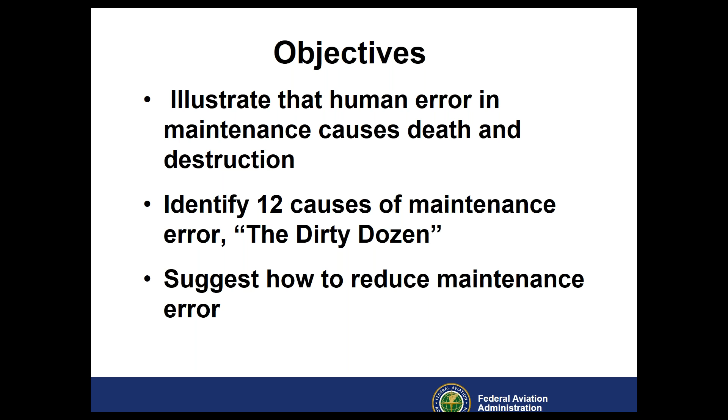When learning of an accident caused by human error, it is common to think the person involved is somehow deficient in skill or character, while we, on the other hand, are well-meaning, motivated, experienced technicians. We just wouldn't do something that stupid. When we think in these terms, we discount the moral of the story and miss the lesson in it.

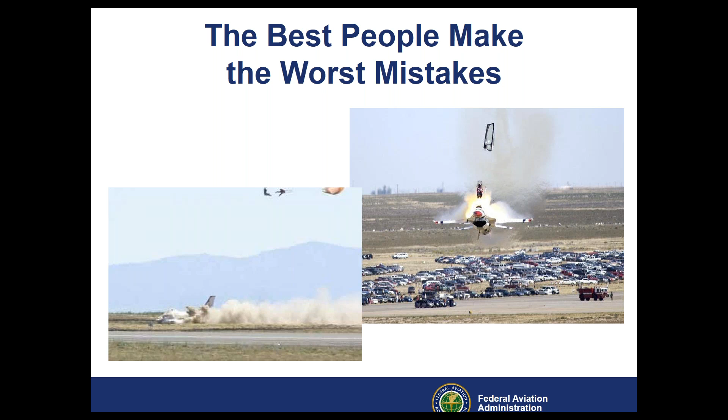Okay, well, or maybe I did find one ejecting from a helicopter modified by Rotor Floater. Not true, but an April Fool's article from 2015. So don't publish that picture anywhere and tell them it's a factual picture.

So how do we prevent mistakes like this one? How do we break the chain of events that may well result in the loss of an aircraft, or worst case, a fatality? The Dirty Dozen is a poster series highlighting 12 preconditions for unsafe acts. In other words, factors that influence people to make mistakes. The series of posters was developed by Gordon DuPont while working with Transport Canada. It's not meant to be a comprehensive list. It's just meant to stimulate the human factors discussion.

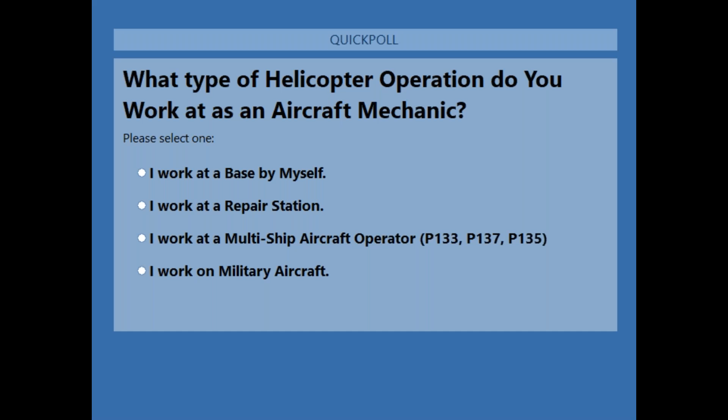Hey, Tim, what's the procedure to actually vote? Do you select one of the dots and then press submit? Is that how that's done? That is, you select one of them and hit submit. Let's go ahead and I'll wind it down here. And we just hit 70%. I'm gonna go ahead and close it. I'll share this thing with everybody. So 33% work at a base by myself, 28% at a repair station, 26% at the multi-ship operation, and we got 13 military aircraft. So that's pretty evenly spread out there.

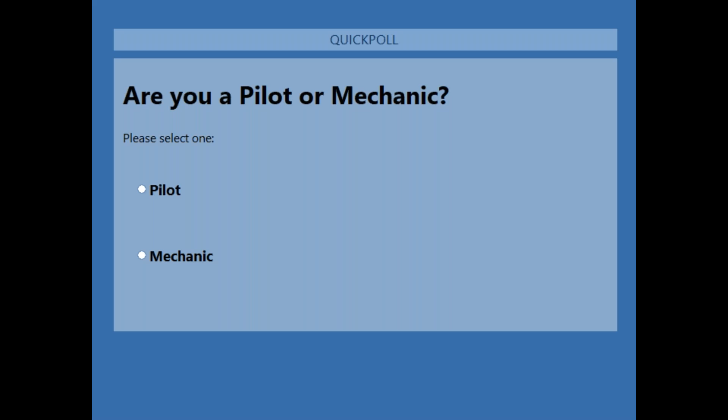Let's do one more poll right quick before we get going. We kind of want to find out who we have tonight. So this one, basically we just want to know, are you a pilot or a mechanic? Just select one. I probably should have put a third one down there, both. What's your primary job? Let's look at it that way. Is your primary job a pilot or your primary job a mechanic? Well, we're coming in 85, 86. Now everybody wanted to vote on this one, but they just didn't want to vote on that other one. They got 88. Let's go ahead and close that. And we'll share that with everybody. So 74% mechanics, 26% pilots. All right. So let's go ahead and keep right on rolling.

And I don't think James mentioned, we do have about 5 handouts down there that you can download in the handouts. We've got some good stuff down there. We've got the Dirty Dozen list. We also have an AMT checklist. We got inspection best practice. We got the mechanics creed, and we also have weight and balance for helicopters. So let's turn it back over to James.

Hey, Tim, before you do that, could you just describe to our people attending how to download those handouts in case they didn't know? You should be able just to click on it and download it. Some people have an issue. I currently have an issue where I can't download from a GoToWebinar. If you're having an issue, if you click on it and it's not allowing you to download, at the end of this presentation, we're going to give you a list of email addresses. Email anybody on that list and they should be able to get you a copy of the PDFs if you can't download it. But you should be able just to click on it and click download. Hey, thank you, Tim. I appreciate that.

And just wanted to go ahead and go to the next piece of information. Appreciate all the input from the poll, guys. I did want to mention too that this was not originally advertised to give Wings credit, but I did go into the webinar, and we are going to give everybody 1 hour of Wings credit for all the pilots that are attending.

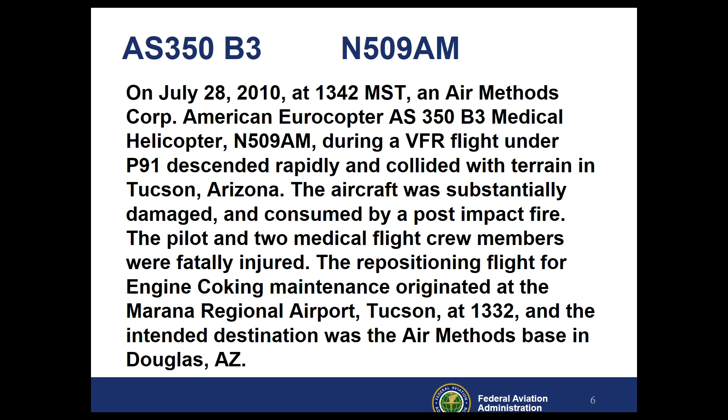The first item we're going to cover on the Dirty Dozen is lack of communications. Some of the safety nets you can use are logbooks and worksheets, doing a good thorough shift turnover, discussing the work that's been completed with the people who need to know, and always asking yourself that question: who needs to know this information? And never assume anything. Always double check your work, remove the inspection plate, and ask your teammates to explain. This is probably one of the toughest Dirty Dozen for all of us as mechanics to make sure that we do.

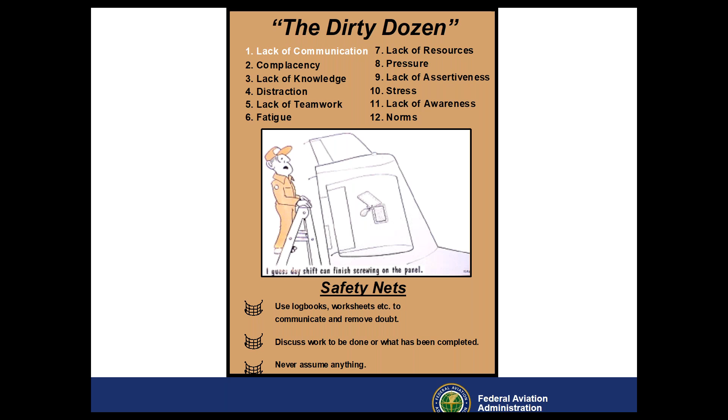Okay, we're going to cover a document that the FAA uses very often. I'm going to give you a little bit of background on that. In 1953, the Civil Aeronautics Board, or the CAB, revised the civil air regulations to require that each operator apply for an OPSPEC, or operation specification, at the time of application for an air carrier certificate or an air agency certificate. Air carriers that existed at the time were issued OPSPECs to be used instead of the competency or temporary letters. The OPSPECs provide an effective method for establishing safety standards that address a wide range of variables. In addition, OPSPECs can be adapted to a specific certificate holder or operator's class and size of aircraft and different kinds of operations.

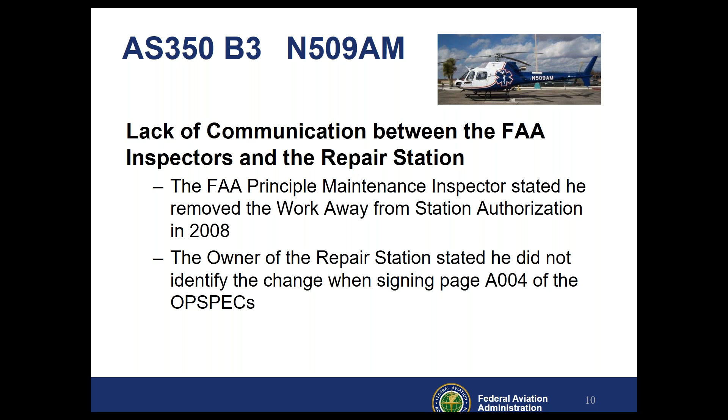Let's review. We're going to discuss the Dirty Dozen. So look at this. On this slide, you see lack of communication between the FAA inspectors and the repair station. When the investigation was conducted, the FAA principal maintenance inspector stated he removed the work away from station authorization for the repair station that supported Air Methods. The owner of the repair station stated he did not identify the changes when he signed the page of A004 of the OPSPEC.

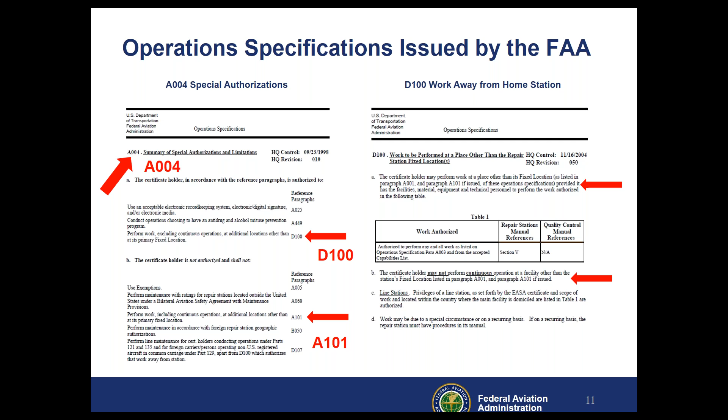The next dirty dozen we're going to cover is complacency. It can be caused by a lack of sufficient stress. We hear stress is bad for our health, and too much unresolved stress certainly is. However, we need a moderate amount of stress for optimum performance. While too much stress causes confusion and fixation, too little stress can be a problem as well. It can cause a person to be bored and complacent.

The following example is a case where a complacent person's mistake had dire health consequences. And everybody's experienced this in life. When you get really stressed out, you get frustrated. But when things are so relaxed, sometimes it can and cannot be good. And so let's go ahead and cover that dirty dozen. Here's the example of complacency.

The Turbomeca service. I want to mention one thing real quick too. All of these organizations are professional organizations that we use for these case studies. They're very professional. I myself worked for Air Methods for many years, and they were very professional, very organized in what they did. And so this is not a knock on any of these organizations. I just wanted to mention that real quick.

As a Turbomeca service center, Helicopter Services of Nevada provided levels 1, 2, and 3 maintenance service, parts, and tools. The Turbomeca Service Center technicians completed a Turbomeca design checklist and engine build when performing field maintenance. Turbomeca, who makes the engine, does not require its outside service centers to document their work with the forms, and they are allowed to develop their own forms to document work. Helicopter Services of Nevada developed their own work order forms and checklists that were completed when work items were accomplished.

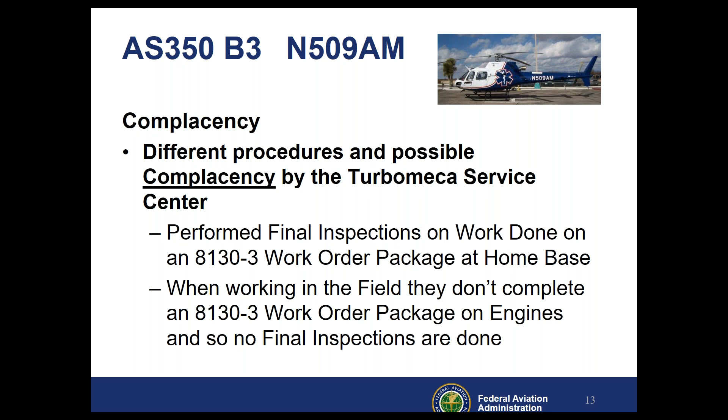So the safety nets that you need to remember on complacency are, we need to face the reality that our industry's mistakes, even slight ones, may kill someone. Some of the safety nets you can implement are physical fitness; you always feel much better after physical fitness. It helps you think clearly, it makes you feel good. Create challenges for yourself. Challenge yourself to find faults every day. Never sign for anything you didn't do. It's also an ethical decision you have to make sure you're doing when you don't sign for something you didn't do.

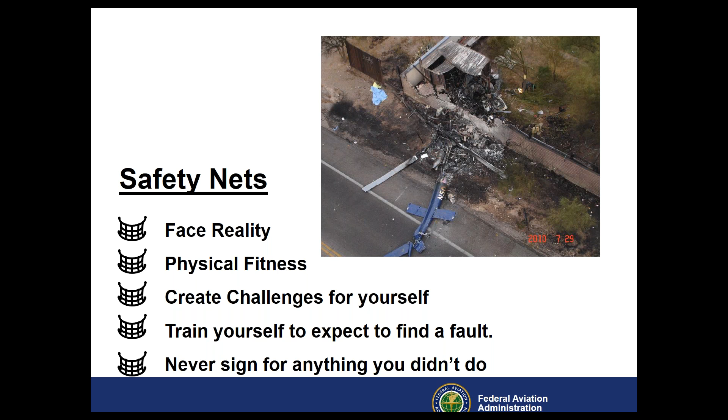The next item we're going to cover on the Dirty Dozen is lack of knowledge. And you may think lack of knowledge is about inexperience. However, the rational point of view is that aviation is incredibly complex. No one has all the answers. We might all lack knowledge in tasks that are not familiar to us. Even experienced people need to refer to up-to-date manuals and ask questions. People can be very sharp and very well-meaning, but if they are untrained, bad things can happen.

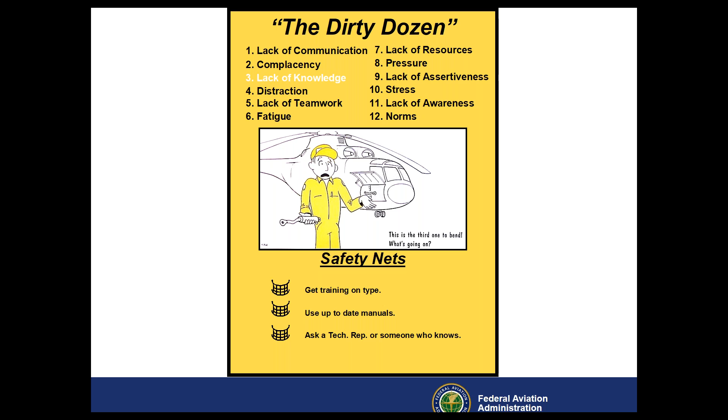Even in this presentation, I had to call my guys I used to work with in Air Methods and ask them questions about the engine because I couldn't remember all the stuff that I used to do back in the day when I was a relief mechanic for Air Methods. Okay, lack of knowledge. This is actually for the pilot. So here's what happened. The Marana duty pilot performed a ground run of the helicopter. This is after all the maintenance was done. And they found that the engine's hydromechanical unit was found to be leaking.

The next day, on July the 27th, the HMU leak was resolved and the pilot again performed a ground run. The ground run came out good, and the pilot then asked for permission from the area aviation manager to put the base out of service while he performed the post-maintenance flight check. The Air Methods AVL hub interface, I'm going to assume this is a computer system that tracks how long the aircraft flew remotely, recorded that the maintenance test flight occurred on July 27th from 17:43 to 17:50 hours, and that's just 5:43 p.m.

to 5:50 p.m. It's just converted into military hours. So we're talking a total of 7.5 minutes. According to the pilot, the following items were done during his maintenance check.

As you can see by the slide, he did a droop check, a rate of climb check, a cruise power check, a flight limit indicator check, a flame out check, and an auto rotation. Now, 7.5 minutes doesn't seem very long for all those checks, but that's what the system recorded. And there were no actual written records of that test flight of exactly what he had done.

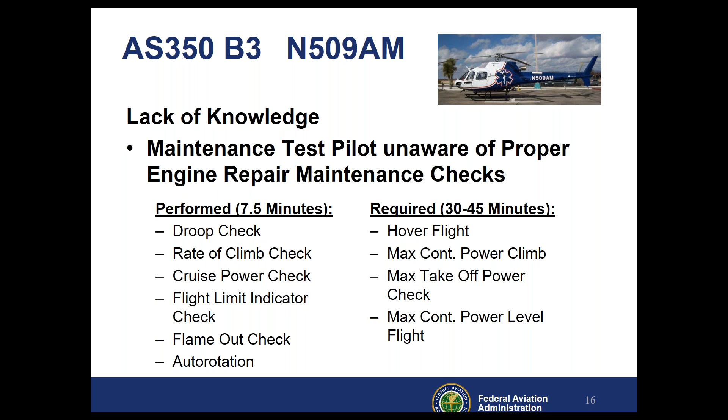Okay, the next item we're going to cover is lack of knowledge. Here's some things you might want to consider. Get training on type. Bad things happen to untrained people. Put yourself in the place of the maintenance test pilot. He was trying to save the company money by saving hours, cycles, and fuel costs. His motivation was not in doubt. His method leaves a bit to be desired. He probably would have liked to know what should have been tested after an engine disassembly and reinstallation of a turbine engine on an AS350B3.

So recommendations or your actual safety nets are going to be stay current, read up-to-date manuals, trade magazines, websites, and human factors information. And I tell you, I appreciate you guys being on this webinar because it shows that you're trying to stay current. Use up-to-date manuals. Also, ask a tech rep. Tech reps are actually very approachable and will help you in a lot of cases if you get stuck on a situation. So definitely get in touch with them and communicate.

Humility will make you go a long ways in aviation. I had to swallow a lot of humble pie in my career. Thank God I did, because I needed to. I learned a lot when I did that too.

So the next item for the Dirty Dozen is distraction. Does anyone have a cell phone? It's become a feature of our culture, whether we're driving, listening to a speaker, or maintaining an aircraft. In some cases, it can be disastrous. Our jobs and our lives are full of distractions. A distraction shifts one's focus from a job at hand and increases the potential for a prospective memory or place-losing error. Distractions can come in many forms, such as noise, bright lights, people, radio messages, telephone calls, horseplay, and problems at home.

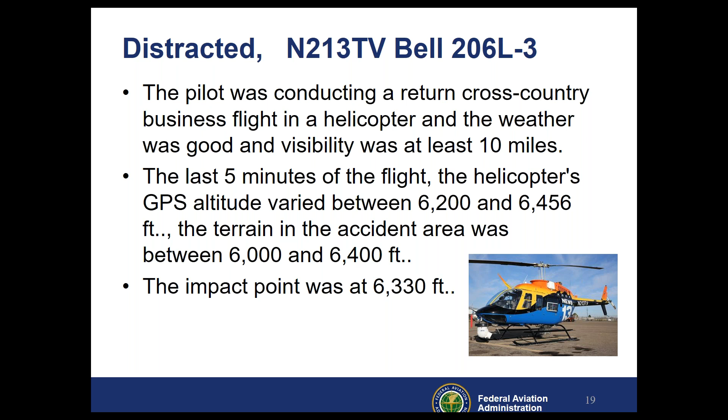The pilot's cell phone was recovered, and a review of the phone records revealed that at 4:12 p.m., he called a rental car agency. An agency employee stated that she remembered the call well. She added she could not tell that he was in a helicopter, but that he seemed busy or distracted. And that, as they were talking about a future rental, and she was mid-sentence, the line was disconnected. Interesting.

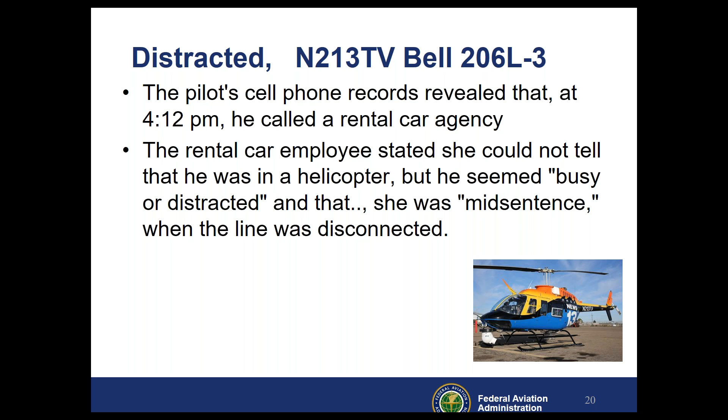No matter how you look at this accident, it was caused by a distracted person who was attempting to save time, but was not in a good situation to use the device. As you can see by the slide, you can assume he was distracted by a cell phone. Okay, here's what I would recommend. It's best to use the communication systems in your aircraft, since they're designed to be used during flight.

And I'm going to let you guys know, and y'all know this, in a helicopter, you don't have many limbs available to do things with. A handheld cell phone is not designed to be used by a pilot in an aircraft. One other consideration, and most important, is that helicopters have 3 controls. A person should be operating these with their limbs.

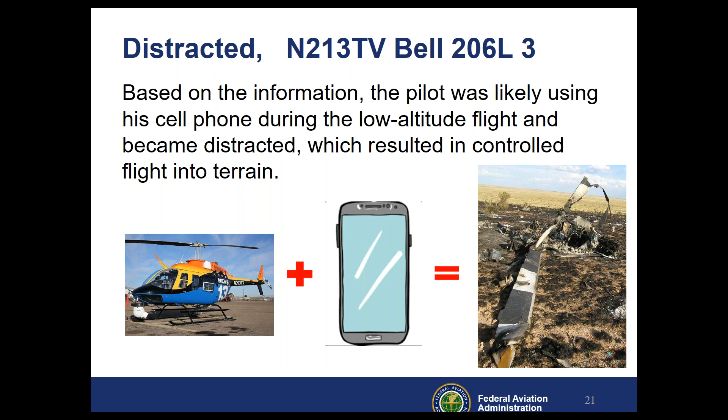If there's any non-helicopter people out here listening, just for your information, one is the collective with one hand. The other control is the cyclic in another hand. And the other is using their feet to operate the tail rotor pedals. So how can you operate a phone with all your arms and legs in use? Okay? Yeah, you can't. I feel bad for this guy and his family, I really do. But let's know saving time is not always worth it.

Okay? Next up on the Dirty Dozen is safety nets. Don't use cellular phones while conducting maintenance or while flying an aircraft. Don't try to do 2 things at once. Always finish the job or unfasten the connection. In one of the cases described earlier, finishing the job by torquing the hardware could have prevented the accident. The alternative would have been to leave the connection unfastened. That would have also prevented the accident.

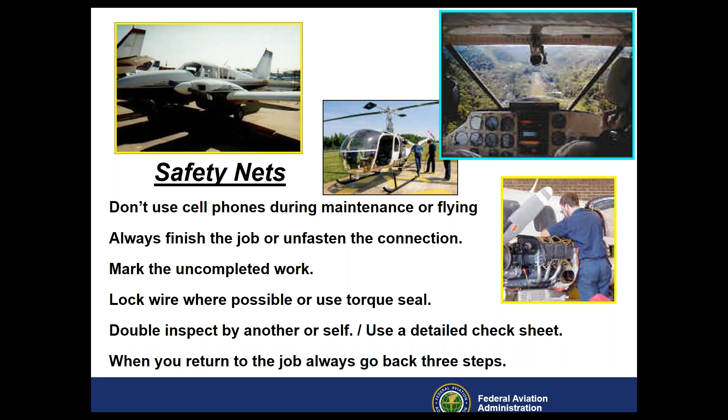The engine would not have started if the fuel line was disconnected, or he could have marked the uncompleted work by hanging some wire or maybe a remove before flight tag. You can lock wire where possible or use torque seal. You can double inspect by another or self. You can use a detailed check sheet. When you return to the job, always go back 3 steps if you have to stop at a certain point. That's a great recommendation.

The next item up on the Dirty Dozen is lack of teamwork, okay? As mechanics, we're used to working alone, so the concept of teamwork can be a real change in thinking. And I say this because there are some isolated bases out there. I'll give you an example. If you're out there and you're in Alaska and you're a single person at your base, you don't have anybody to look behind your work.

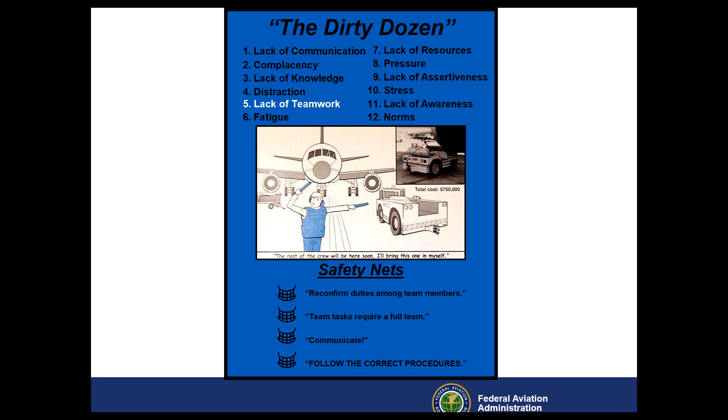So you're going to have to look and have yourself as a double checker. Just remember that, okay? But if you have a pilot, you can always have them check. So, you know, consider that when you're using teamwork, and always communicate. And here's the example for lack of teamwork.

Between 24 July and 26 July, the accident engine was disassembled first, and the mechanics realized they would need additional parts and tooling to complete the work. The accident engine was set aside and the second engine was disassembled and the fuel manifold replaced. As the Air Methods mechanics completed the work on the second engine, the HSN, or repair station technician, replaced the manifold on the accident engine.

During the work on the accident engine, Module 3 was disassembled. The fuel injection manifold was replaced. The engine was reassembled by just the HSN technician, or the repair station technician, including the fuel inlet union. The engine was reinstalled into the helicopter by Air Methods maintenance personnel. The HSN technician inspected his own work, and as an HSN technician working away from its fixed location, he had the authority to inspect his own work.

So just remember that. This is one of those situations where the HSN technician was within his legal authority, but let's ask that question on the slide. What would have happened if he would have asked the Air Methods mechanics to check his work before reassembly? Oh my gosh, this whole incident would have never happened.

It's easy for me to say that after, you know, knowing all this information, but when you're in a detailed work environment like that, where you're digging into an engine and reassembling modules, that's pretty complex work that we all have to do and do safely.

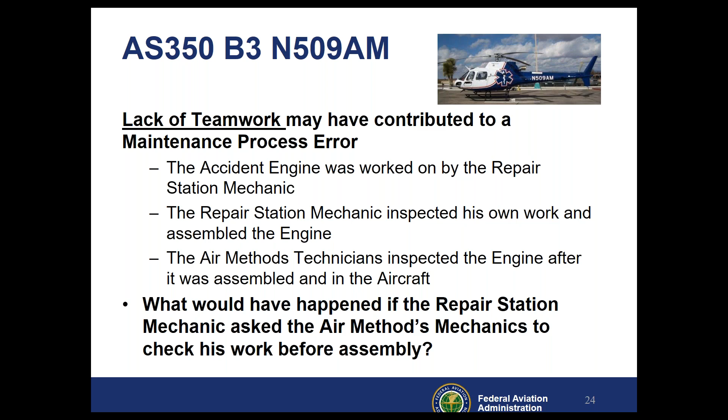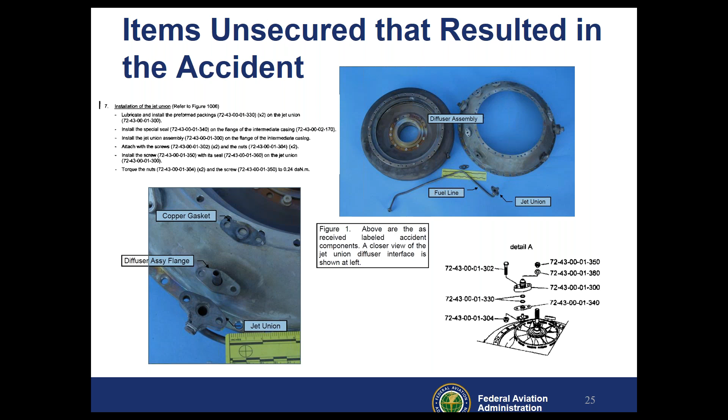Note the bolts, the manual calls them screws, but they're technically bolts, and nut hardware were not found at the accident site, okay? So that's why these figures are in here. So these are new examples of the components that were received for comparison. The detail A and picture displays the exemplars of the jet union associated attachment hardware.

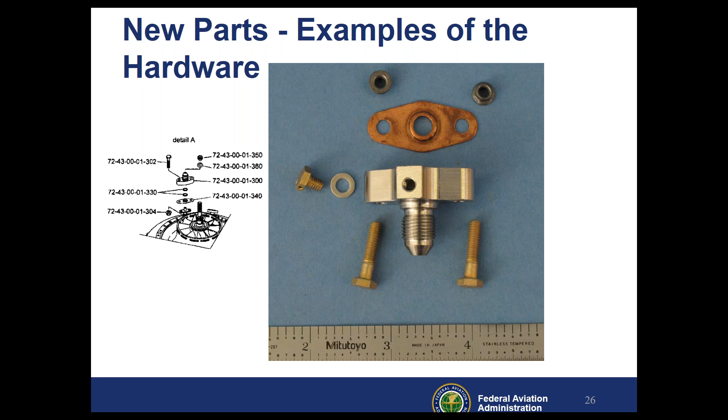So the items that they couldn't find were the mounting bolts and nuts. Okay, those were the items that were missing. We can only make an assumption that the mechanic may have finger tightened them and not actually torqued them, but we don't know for sure, because they were never found at the accident site.

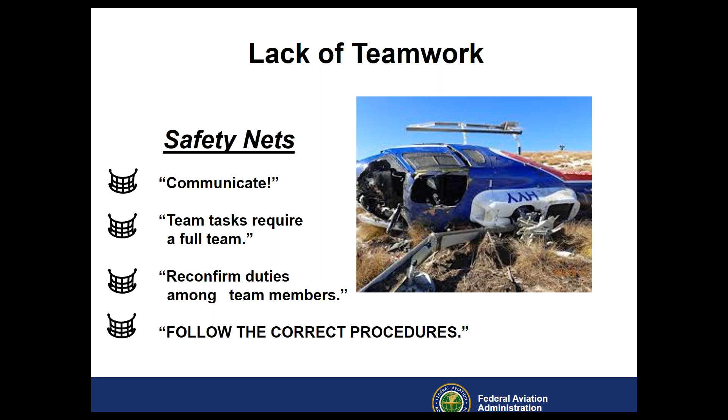Okay, let's cover the safety nets for lack of teamwork. Communicate. Go ask that person across the hangar to inspect your work before you put a cover panel on. Team tasks require a full team. You know, eat some humble pie. I've made mistakes in the past where I had to eat humble pie, and it's always a good idea to have someone look at your work, follow the correct procedure, and reconfirm those duties among team members. Those are some good safety nets to remember for lack of teamwork.

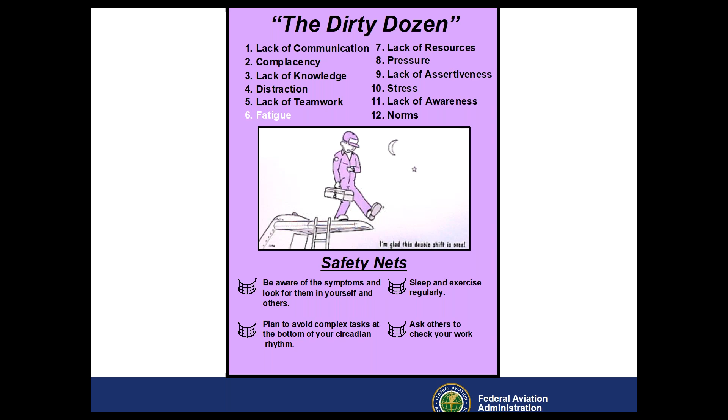The next item we're going to cover is fatigue. Fatigue is a constant threat to all of us. There are three types of fatigue. Acute and operational fatigue are really the same thing. They're caused by hard work and long hours. It's really only a matter of duration. Chronic fatigue is something that requires medical intervention. It is depression and needs at least counseling and possibly medicine.

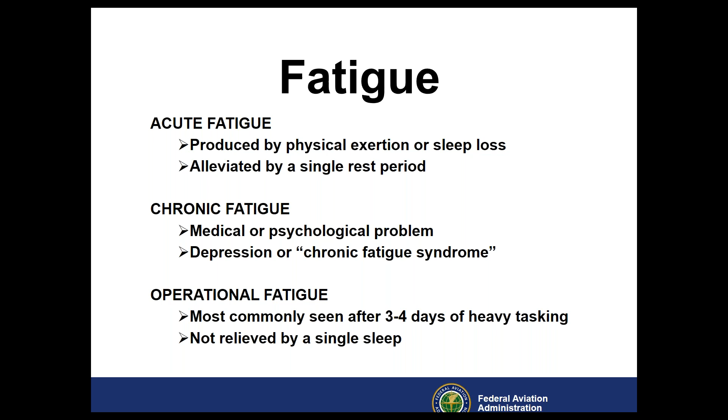And there's the symptoms of fatigue. These symptoms are true of fatigued people regardless of the category of fatigue they're experiencing. Chronic fatigue and chronic pain are similar in that they exhibit similar symptoms. The symptoms are often more evident to those who are working around the fatigued ones than to them. And that is definitely true. I've worked in environments where we've had to stay up long hours in the military, and you'll notice that when people become fatigued, they'll start slurring their speech, they'll start making a lot of mistakes. So be on the lookout with your coworkers and let them know if you see them fatigued.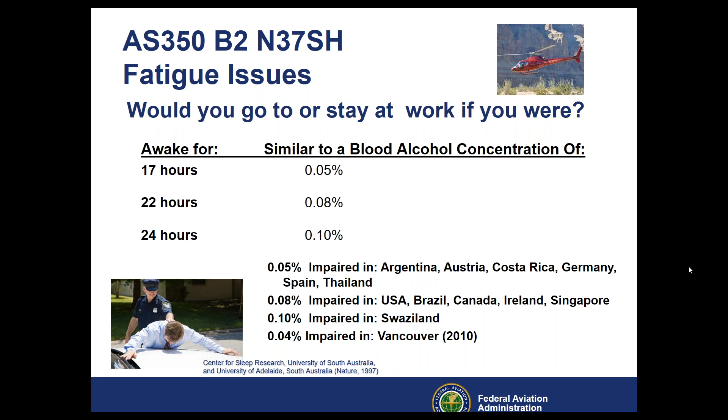This slide covers fatigue issues, and like I mentioned earlier, we're going to cover this case study later on in the slide presentation. Tim Haley is going to go over it. But here's some examples of a mechanic and inspector and the duties that they pulled. In this example, the mechanics had a normal shift and their bodies were used to that, okay? That circadian rhythm was set to these schedules.

In the example we're going to cover, they were supposed to be off the day that they worked. And the day that they worked, instead of working from 12 until 2300 hours, which would be 11 p.m., they worked from 0550 a.m. to 6:46 p.m. at night. Okay, that's a long day. And they're really close to each other. But the mechanic claimed he only got 5 hours of sleep, and the inspector claimed 7 hours of sleep. And again, like I said, Tim Haley will cover this accident on this AS350B2 coming up.

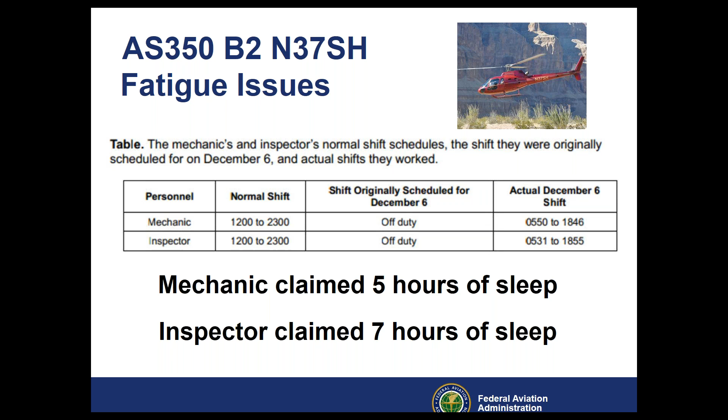You know, I've been through this also with heavy maintenance when you're trying to get an aircraft in and out. I'm sure you probably have too.

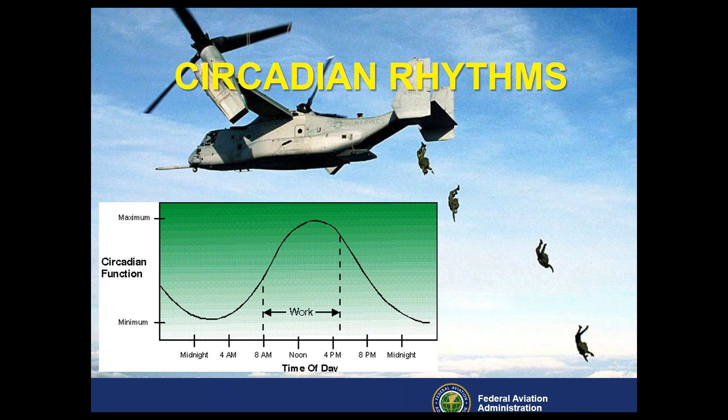Some of the safety nets that you want to make sure you're aware of for fatigue is be aware of the symptoms and look for them in yourself and others. I mentioned this earlier. Sometimes it helps to notice it in others, because when somebody becomes so exhausted, they don't realize that they're slurring their speech, they're having problems speaking, and they're having problems thinking clearly.

Plan to avoid complex tasks at the bottom of your circadian rhythm. Sleep and exercise regularly. Ask others to check your work. Those are really, really good safety nets for fatigue.

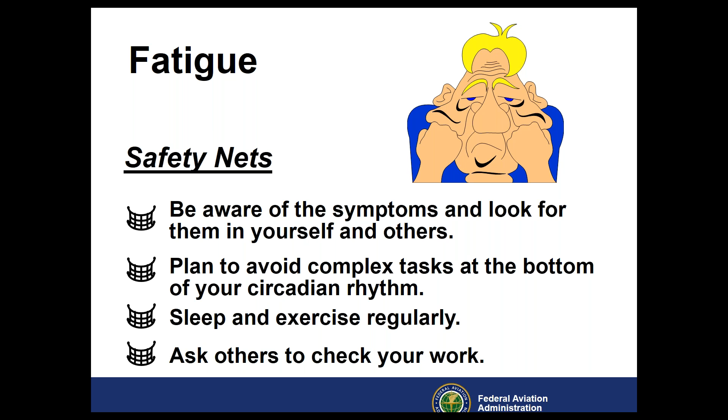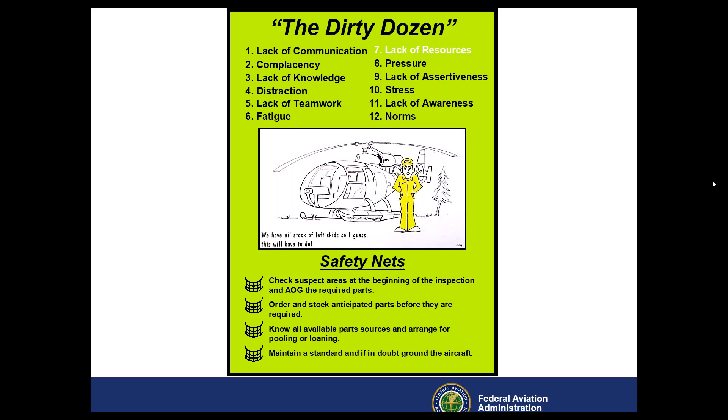Okay, I believe we are ready to switch over, and we're going to have Tim Haley take over. Hey, thanks, James. I appreciate that. Let me get this changed over right quick.

Fatigue, that's a tough one right there. There's a lot of people out there who don't recognize all the issues that they're having with fatigue.

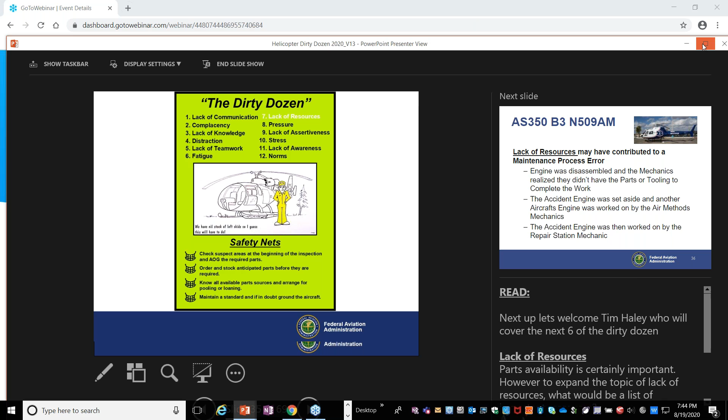Let me get this changed over. You have the controls, Tim. We are seeing your preview screen right now.

Okay, thanks. All right, so we're going to talk a little bit about lack of resources. I think we've all probably run into the issue of lack of resources. Parts availability is certainly important. However, to expand the topic of lack of resources, what would be a list of important resources? How about money? Parts are expensive.

What about people? Mechanics called in sick today. Supervisor's out. How about time? Deadlines to meet. Tools, specialized tooling, we don't have it. Data, we don't have the proper manuals. All these are lack of...

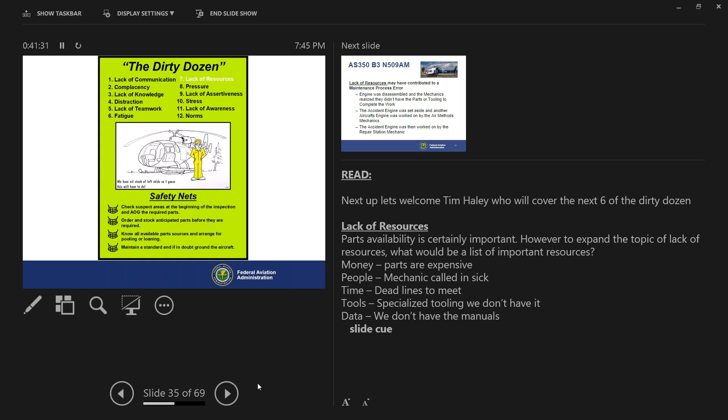Hey, Tim. Yes, sir. Hey, we're seeing your preview screen, not your presentation screen. Just a quick heads up. In other words, we're seeing the other screen. You need to go to your other monitor. All right, give me a second. Sorry about that, everybody. Are you getting the presenter notes? Yes. Sorry about that. Not a problem. There you go. We got you. Thanks. We just seem to be having technical issues tonight.

Lack of resources may have contributed to a maintenance error, process errors. The engine was disassembled and the mechanics realized they didn't have the parts or the tooling to complete the work. The accident engine was set aside and another aircraft engine was worked on by the Air Methods mechanic. The accident engine was then worked on by the repair station mechanics.

You know, it seems like we're picking on this Air Methods, but this one is a good example of the chain of events. There was a lot of different breakdown in the dirty dozen that led to this accident.

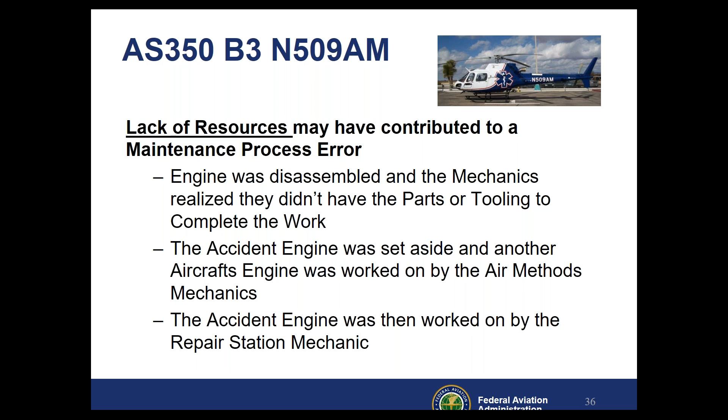The HSN technician inspected his own work, and as the HSN technician working away from its fixed location, he had the authority to inspect his own work. The Air Methods mechanic stated that they did not specifically inspect the HSN technician's work. However, they did inspect the engine after it was installed into the helicopter. Federal Regulations Part 135 does not require an independent inspection of maintenance.

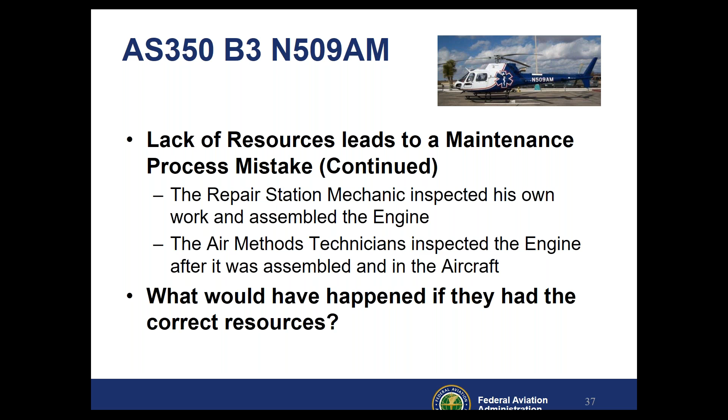So what are the safety nets that we could have used for lack of resources? Check suspected areas at the beginning of the inspection and AOG the required parts. Order and stock the anticipated parts before they're required. Know all available part sources and arrange for pooling or loaning.

Maintain a standard, and if in doubt, ground the aircraft. That last one seems to be the one we all have trouble with. Nobody wants to be the person that grounded that airplane.

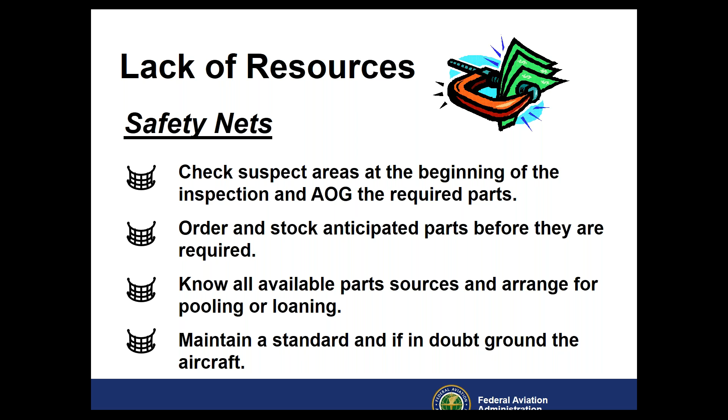So let's move on to number 8, pressure. That's one we probably all felt right there. A certain amount of pressure is appropriate, but too much pressure can cause a technician to make a mistake. If there is a generic hazard in aviation maintenance, it would be pressure to produce. Pressure to produce causes a drift to the dangerous methods. Pressure to produce is where the shortcuts come in.

Features of pressure to produce are completion of work desired, lack of resources, supervisor condoning unapproved action to get the aircraft underway, the end justifies the means, releasing the aircraft with work undone. Signs of excessive pressure to produce are being asked repeatedly, how long is this going to take? Getting frustrated and angry during the job, wanting to go home.

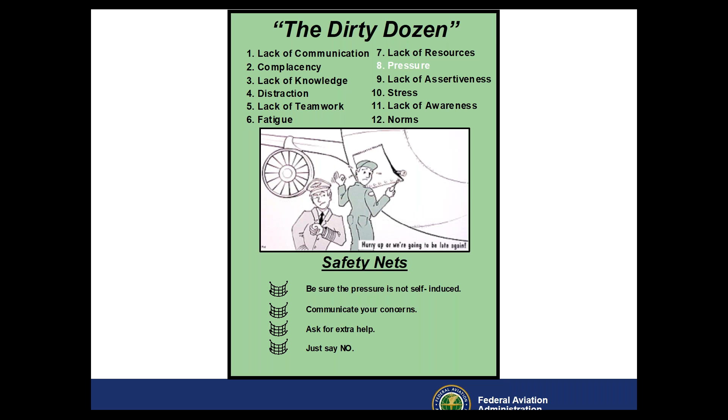Mechanics felt pressured after the first engine run after maintenance. The Air Methods CEO was coming in for a visit. The Safford base was out of service. No backup aircraft was available since the backup helicopter was in use at Douglas. In interviews with the Air Methods mechanics and the HSN technician, they all reported feeling a sense of pressure to complete the maintenance and return the helicopter to service.

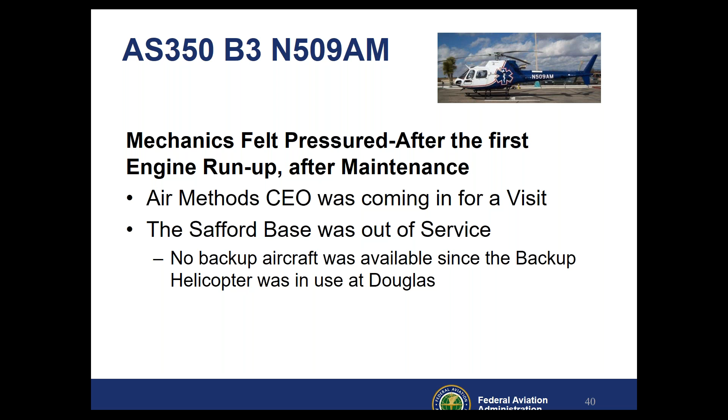The Air Methods area aviation manager stated there is some internal pressure on pilots and mechanics because they know if they are not getting enough flight volume per month, for example, 10 or less, then their base may be considered for closure. All the bases in the Southern Arizona area were doing okay.

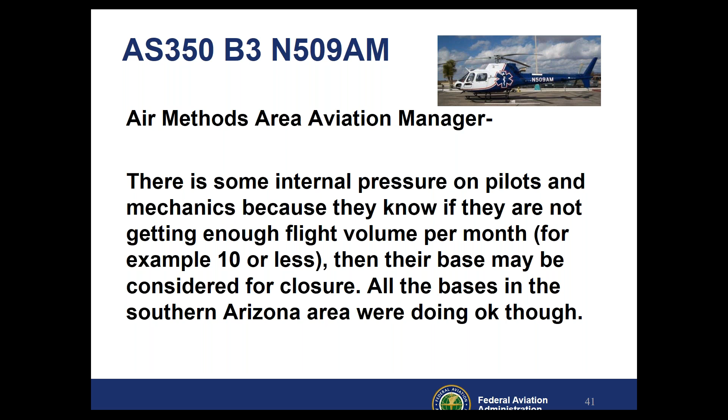So let's take a look at this V-22 Osprey. The Bell Helicopter Textron Boeing Helicopter V-22 Osprey tilt-rotor aircraft was being ferried to a military base in Quantico, Virginia, when it suddenly plunged into the Potomac River while on the downwind for landing. The July 20th, 1992, crash killed all 7 crew members aboard.

The court of inquiry said that the fluid leak into the right engine may be attributed to maintenance errors installing an oil seal backwards on the torque meter shaft. But the report added that it could not conclusively determine that this reversed oil seal caused the leak. Thus, the possibility of other leaking seals or sources could not be ruled out.

In addition, the report said ground testing with incorrectly installed seals did not show significant leakage, but a leak did occur on another Osprey V-22 with an incorrectly installed seal, according to the government witness. Maintenance errors cannot be assigned with certainty, but are considered to be a probable cause factor. One member of the court of inquiry noted that the system used to conduct maintenance at Eglin lacked organization, defined responsibilities, and a formal reporting and documentation structure.

Secondary cause factors, the court of inquiry said, included ineffective quality assurance of the oil seal installation. The report added that procedures for the removal and replacement of the torque meter seal contained in the technical manuals were vague and introduced the potential for incorrect installation. The report said no design deficiencies were discovered which were unique to tilt rotor aircraft, but suggested the following design changes: drive shaft material changed to improve heat tolerance, new torque meter shaft seals designed to prevent backward installation.

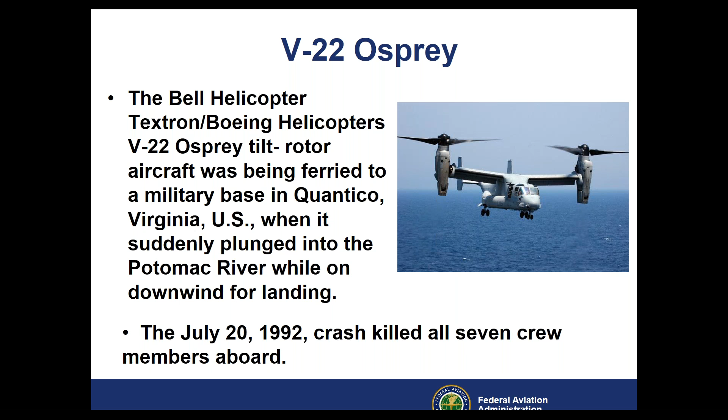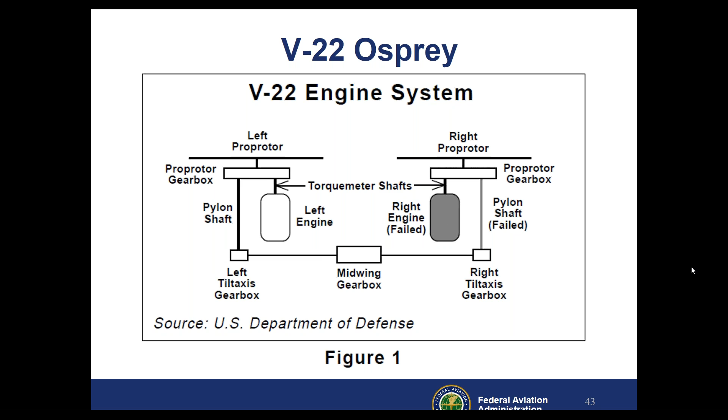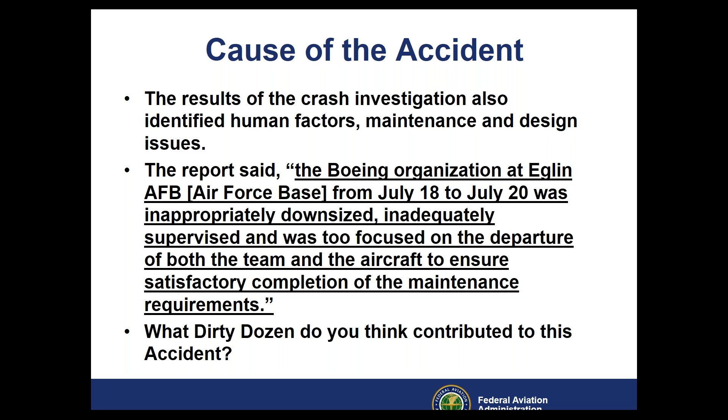The results of the crash investigation also identified human factors, maintenance and design issues. The report said the Boeing organization at Eglin from July 18 to July 20 was inappropriately downsized, inadequately supervised, and was too focused on the departure of both the team and the aircraft to ensure satisfactory completion of the maintenance requirement. What dirty dozen do you think contributed to this accident? Short-staffed, lack of supervision, pressure to make departure time, didn't properly double check their work, lack of knowledge, seal in backwards, design issues. There's several of the dirty dozen that come into play right there.

So the safety nets for pressure: be sure the pressure is not self-induced. You know, how many times are we stressing ourselves by putting pressure on ourselves to meet a deadline that's not really that important of a deadline? Communicate your concerns, ask for extra help. Just say no. That probably is the hardest one of those 4 right there. Just say no, because it's not in our nature as mechanics to say no, we can't get it done. We are can-do people. We want to get it out.

You just got to remember, self-induced pressure can be self-reduced. The picture of the Coast Guard saving capsized boaters is a good example of when pressure is not self-induced. Anything short of life and death can be put into a perspective and dealt with in a rational way.

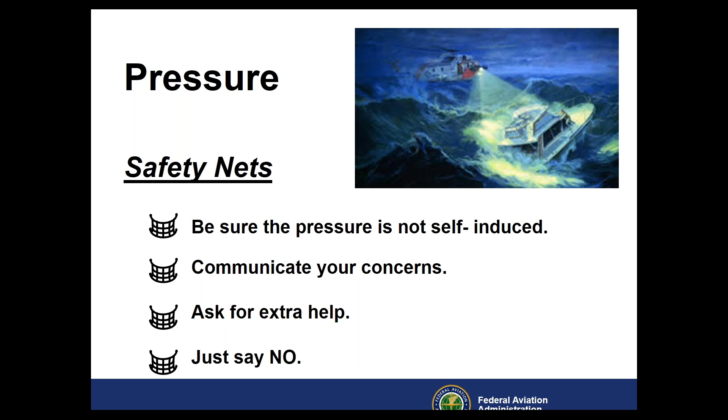One pole is the passive pole. It's a place where the person considers others' rights to be more important than his own. Someone operating at this pole will compromise their standards to get the job done. The other pole is the aggressive pole, where the person considers their own rights to be more important than anyone else. This is where the person is offended and becomes angry. Angry people nearly always regret their actions after they calm down.

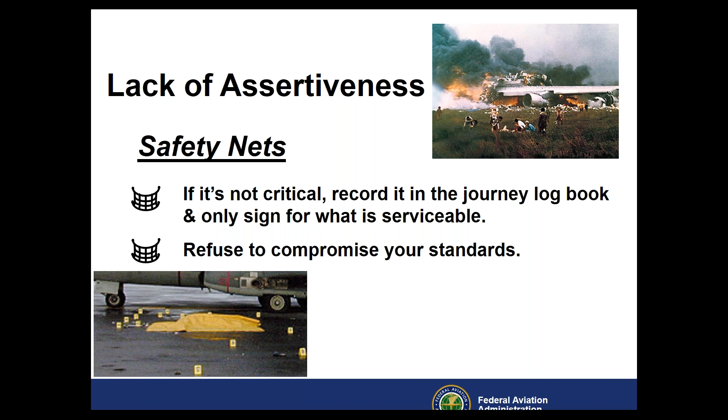Stress. Oh, here's a good one. Well, stress, it's a blessing and a curse. It's a blessing in that it is what motivates us to perform. Why do we do anything at all? We experience some kind of pressure to compel us to move. It can be pleasure or pain, but it is stress of some kind. We hear that stress is bad, but a moderate amount of stress helps us to perform at our optimum level.

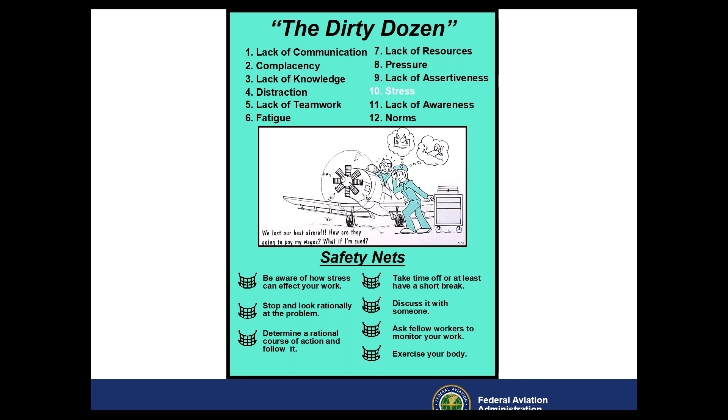This is an inverted U curve, similar to the assertiveness chart. Note that the level of stress is along the horizontal axis of the chart and the performance is along the vertical axis. If stress is low, it causes boredom and complacency. If stress is high, then it causes fixation and confusion. For maintenance folks, it is probably a matter of confusion. I'd hate to think that a maintenance person would become so stressed that the survival instinct would kick in and he would freeze like a deer in the headlights. A moderate level of stress is appropriate. It causes the person to be prepared and ready to perform. A moderate level of stress may be a person's supervisor giving the order to, hey, you guys get busy.

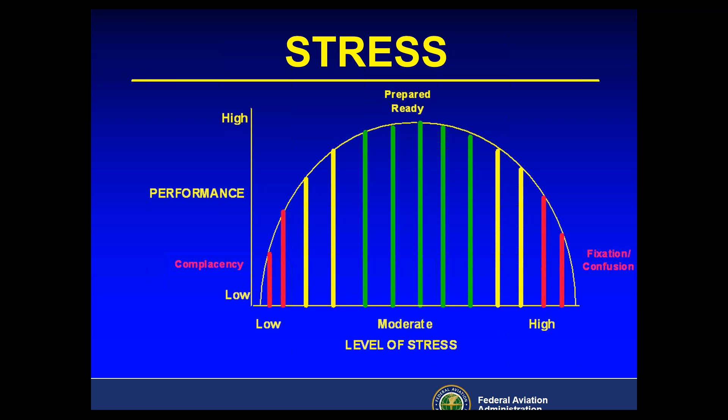So what's the safety nets for stress? Be aware of how stress can affect your work. Stop and look rationally at the problem. Determine a rational course of action and follow it.

Take time off or at least have a short break. Discuss it with someone. Ask fellow workers to monitor your work. Exercise your body. James talked about that earlier.

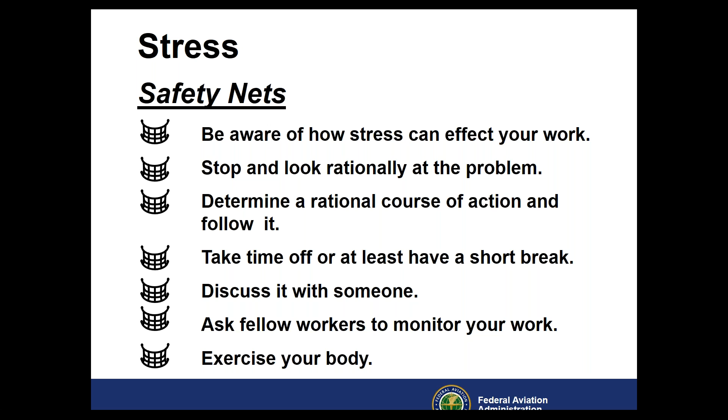Lack of awareness. Lack of awareness or reduced situational awareness can be an indication one or more other human factors issues are in action, such as fatigue or distraction or lack of communication. Here's an example how the lack of awareness caused some serious damage.

Let me give you a little background on that. In the accident, the pilot called the Lifecom. He reported 2 + 55, which means 2 hours, 55 minutes of fuel, which equates to a fuel load of 90%. Mission fuel is usually 2 hours, and the flight to Douglas would have taken 55 minutes. Therefore, the helicopter would have landed at Douglas with a mission fuel load of 2 hours.

A review of the maintenance records showed that on June 21st, 2010, the engine cycles had exceeded the inspection requirements outlined in the AD. The airworthiness directive was due at 600 hours or 500 cycles, whichever occurred first. At the time of the inspection, the engine had acquired 308 hours and 515 cycles. The company identified the oversight and complied with the AD.

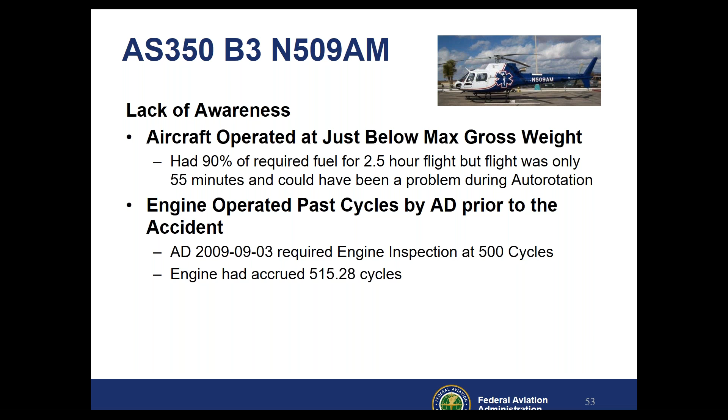There are no 337s on file at the FAA since the aircraft was destroyed in 2010. The documents have been removed. So we don't know if they moved it down there in accordance with an STC or if they had a 337, but for some reason it was moved down to the lower left corner.

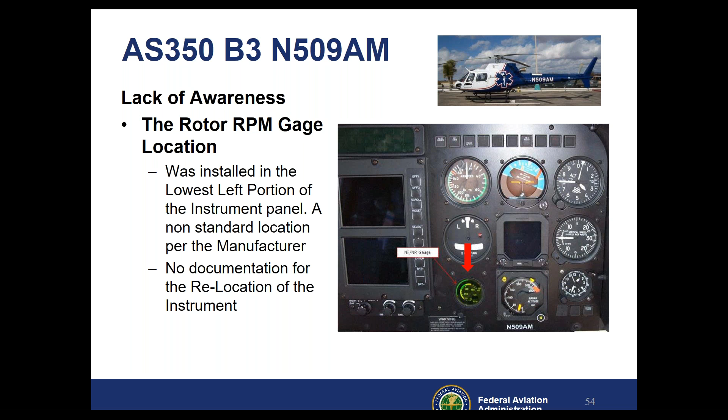The commercial pilot was performing external load operations in the helicopter when one main rotor blade separated, which resulted in a loss of control and collision with terrain. The helicopter rolled downhill and the airframe sustained substantial damage. On-site examination of the wreckage revealed that 4 of the main rotor blades were fragmented into many pieces. The 5th main rotor blade was found about 900 feet from the main wreckage and exhibited less damage.

Post-accident examination of this rotor blade revealed that it had separated due to fatigue cracking that had initiated near the root end of the blade at the second most outboard bolt hole through the spar, skin, and doubler.

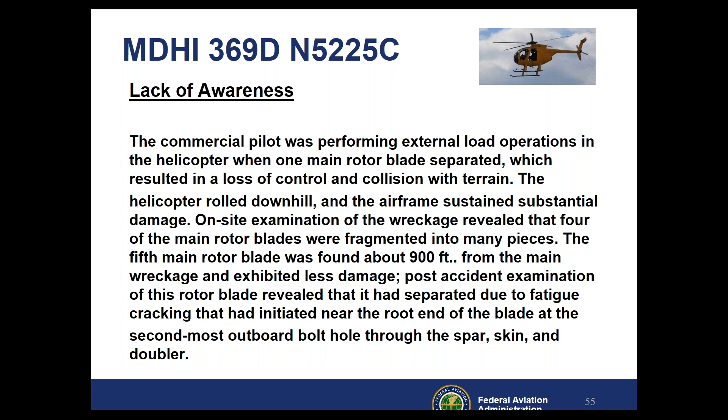The pilot stated he obtained an airframe and powerplant certificate so that he could perform the TE inspection. He added that he averaged about 200 TEs per hour and that he tried to comply with the AD as best as he could on work sites. On a typical job, he usually did not perform the TE inspection until he got home that night.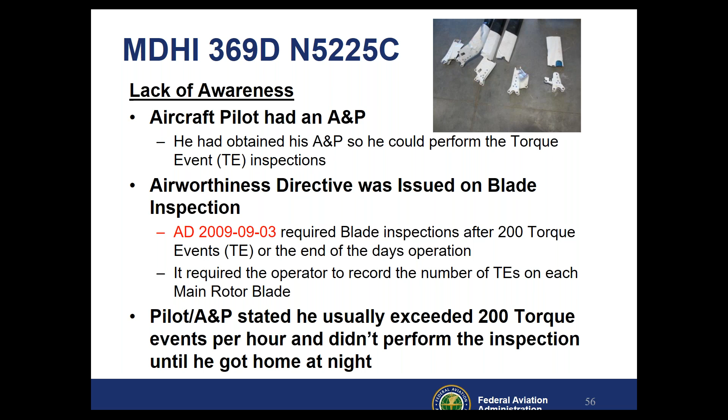Here's a picture of the rotor blades as seen at the crash site. The NTSB determined the probable cause of this accident to be the pilot/mechanic's failure to properly perform required inspections of the main rotor blades at the necessary intervals, which resulted in an in-flight separation of the main rotor blade due to disbonding and fatigue cracking.

Contributing to the accident was a lack of clear guidance in the helicopter's maintenance inspection instructions, which allow for the possible misinterpretation by maintenance personnel of their intent. We've all seen ADs being misinterpreted before, because sometimes the ADs are a little vague and a little hard to understand.

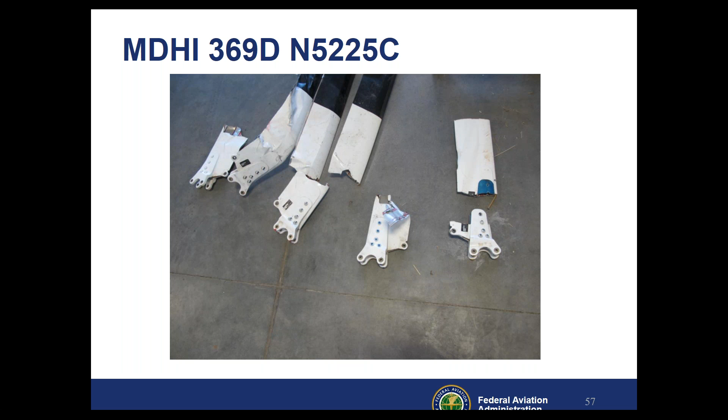Lack of awareness. What are the safety nets for lack of awareness? Think of what may occur in the event of an accident. Check to see if your work will conflict with existing modifications or repairs. Ask others if they can see any problems with the work done.

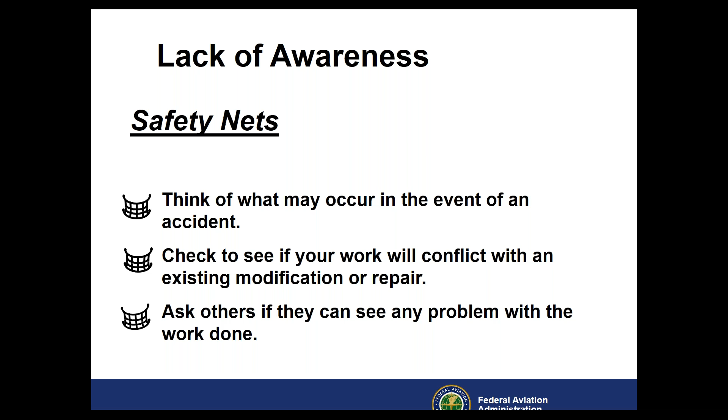Norms. Norms in the context of the Dirty Dozen means our group has a better way to do this job than the published procedures. We call that tribal knowledge. It could be considered tribal memory, unwritten rules enforced by a group, peer pressure, or habits. In the case that follows, someone decided to reuse a castellated nut that was worn out and would not have come loose if they had installed a cotter pin.

If you look up norms in the dictionary, the definition is an authoritative standard, a principle of right action binding upon the members of a group and serving to guide, control, and regulate proper and acceptable behavior. A set standard of development or achievement usually derived from the average. A pattern or trait taken to be typical in the behavior of a social group. Widespread practice, procedures, and customs. I think that's how we most interpret it right there.

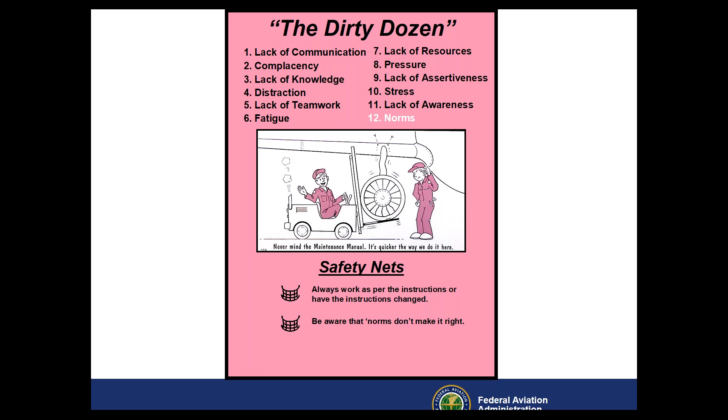In this accident, we mentioned it earlier under fatigue, but norms may have also been a factor. Improper use of connection hardware began a chain reaction that led to the crash of an AS350 on a sightseeing flight. The NTSB says a series of maintenance errors was responsible for the December 7, 2011 crash of a Sundance Helicopters Eurocopter in the mountains east of Las Vegas. The pilot and all 4 passengers on the Twilight Tour sightseeing flight were killed. The helicopter was destroyed and an NTSB meeting convened to review the accident.

The Chairman of the NTSB noted that research has shown that the primary category of maintenance error is failing to carry out necessary actions. Norms in play: did the organization reuse self-locking nuts regularly without checking their self-locking serviceability? This is a self-locking castellated nut, which tells you right there it has two different locking methods on this one nut. So it's got to be a critical component. Here's a picture of what it should have looked like.

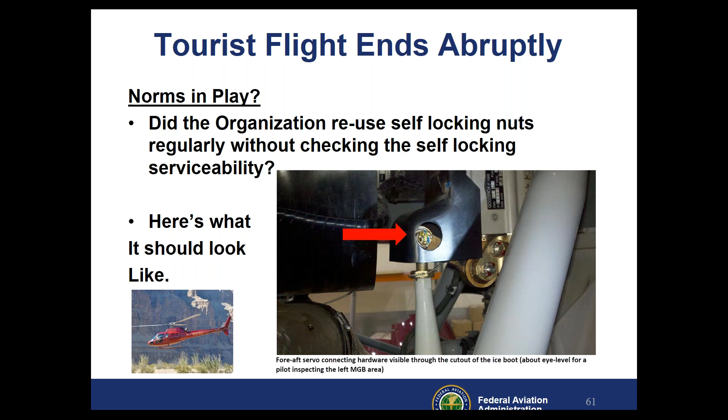The flight began at 16:21 local time when the helicopter took off at dusk from Las Vegas International Airport in VFR conditions with good visibility. The pilot planned to fly to Hoover Dam, about 30 miles southeast, and then return to the airport. The helicopter was not equipped with flight data recorders, and they were not required. However, radar data from the FAA showed the helicopter had been level at 3,500 feet with a ground speed of 120 knots.

Until about 1 minute before impact, it then climbed to 4,100 feet, turned 90 degrees left and slowed. The helicopter descended to 3,300 feet, tracked northeast for 20 seconds before entering a left turn and plunged towards the ground at a rate of at least 2,500 feet per minute. The NTSB said in its final report that parts of the helicopter were destroyed by post-impact fire. The wreckage was found in a ravine about 14 miles east of Vegas.

Maintenance personnel. The mechanic who installed the fore-aft servo received his airframe and powerplant mechanic certificate in December 2008. He worked on maintaining general aviation airplanes and business jets before being hired by Sundance in June of 2011. After his hiring, he received training in record keeping, maintenance procedures, and use of the Eurocopter manuals, as well as on-the-job training, but he had not yet attended any helicopter-specific training. His schedule typically included 4 days of 11-hour shifts, followed by 3 days off, 3 days of 12-hour shifts, and 4 days off.

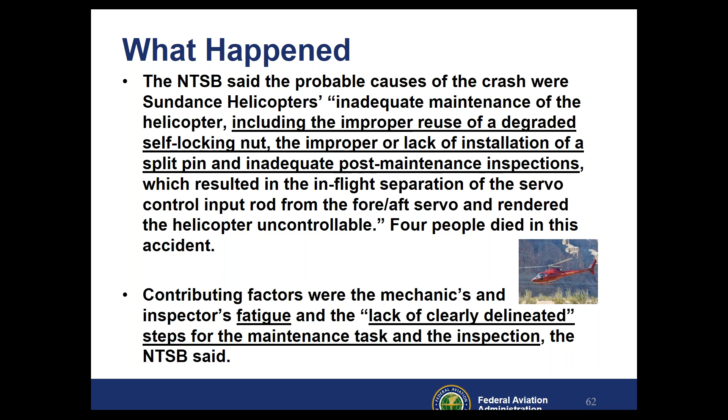So contributing factors were the mechanic's and inspector's fatigue and lack of clearly delineated steps in the maintenance task and the inspection. Okay, what they found at the accident site: the investigators found a forward aft main rotor servo control input rod in the wreckage, disconnected from the main input lever. Its connection hardware was not found at the crash site. You can see by the red arrow that the hole exhibited no damage and there was no hardware installed.

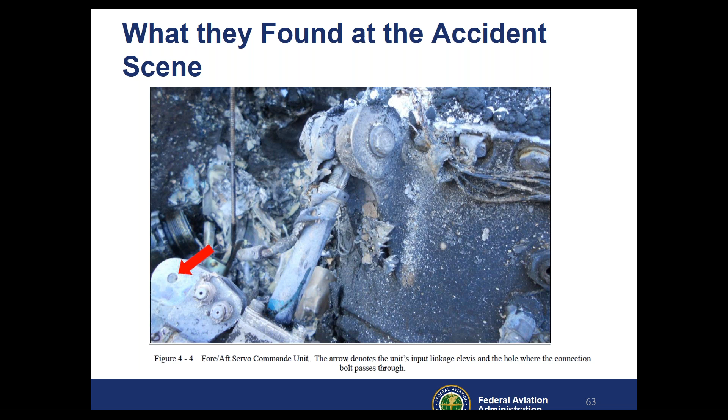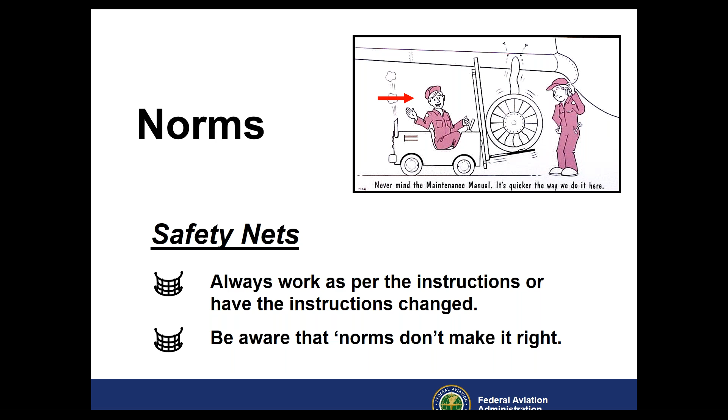So what's the safety nets for Norms? Always work as per instructions or have instructions changed. Be aware that norms don't make it right. The Dirty Dozen is a catchy title, but it's possible there are more than 12 human factor issues. These 12 are meant to stimulate the human factor discussion. What about illness, emotional issues, anger, pride, alcohol, drug abuse?

Errors are part of life. Errors are natural and forgivable. It is the context of the errors that makes them tragic. Maintaining and operating aircraft is the most unforgiving context. The reality we face in this industry is if we make even the very slightest mistake, it may well cause a fatal accident. As we've seen time and time again, it's always a chain of events that leads to an accident and not just one thing.